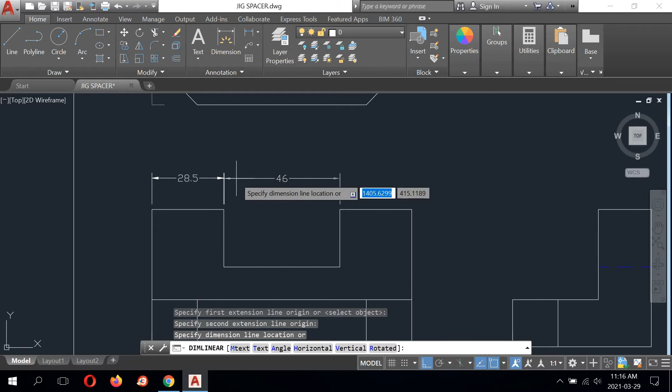Ortho is on, that's always important when running linear dimensions. I'm going to grab a linear dimension from the annotation bar and begin, endpoint to endpoint. Snap that dimension, use a grip, and move it out 12 millimeters. Right click, left click, repeat dim linear, endpoint to endpoint, and snap that 46 right in line. I'm not going to place the 28.5 here since I need to leave one out of the chain.

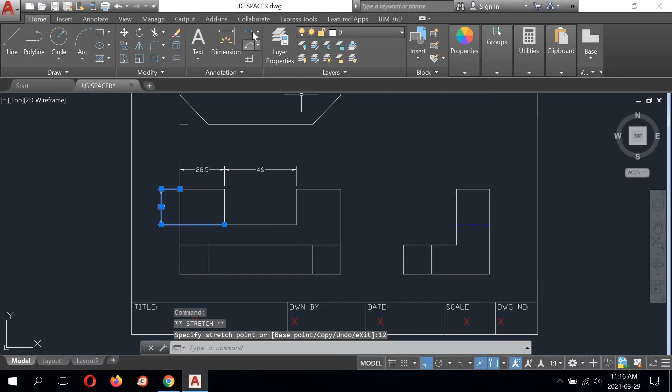So moving on, I also have the 22 dimension, which shows the depth of this slot. I'm going to place the dimension on the outside of the views, like that. If I were to place it between two views, I could do this, but there's no advantage to it because the dimension looks exactly the same whether it's positioned on the right side or the left side.

I might as well keep it out from between two views to eliminate crowding. And anybody doing anything like this, this is completely unallowed, right? Because we're dimensioning to a hidden detail line here. So we have 3 dimensions, but obviously we can only have one of them. This one is definitely incorrect.

Delete. This one is not technically incorrect, but there's no advantage to having it between two views, so we're going to erase it, and we're going to maintain this one. This is the best possible 22 dimension I can place on my drawing. So that takes care of that.

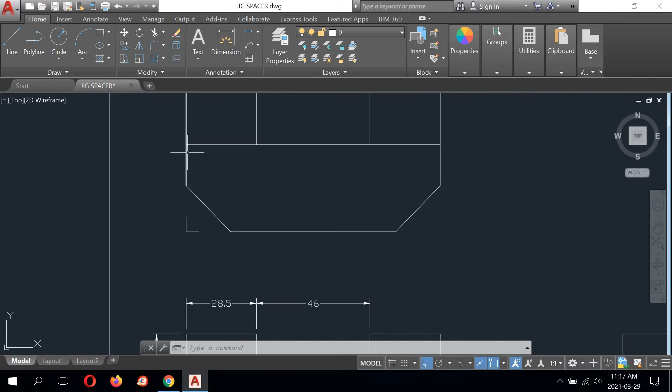What else do we have to take a look at here? Well, we have the 16 dimension, which is listed on the drawing here. So I can actually duplicate that dimension if I want. Let's try that, we may move it later. There's my 16 dimension. What else do I have to worry about?

I have my 34 dimension. I agree with its positioning as well. We can keep this on the top view just like this image shows us. Its spacing is a little far, so we're going to bring it a little closer, as we always have done. Our second dimension is always 10 millimeters from the first.

So we're going to repeat dim linear, go from here to here, snap that 34 in line with the 16, and now we're going to come out 10 millimeters, like that. This drawing isn't terribly hard to dimension. To me it seems pretty straightforward based on everything we've learned so far.

We also have to show the overall height, which is 52.5. That dimension is given, they're showing it to us right here. Again, I could put the dimension here, here, or here. I think I'm going to place it on the right side of the right side view.

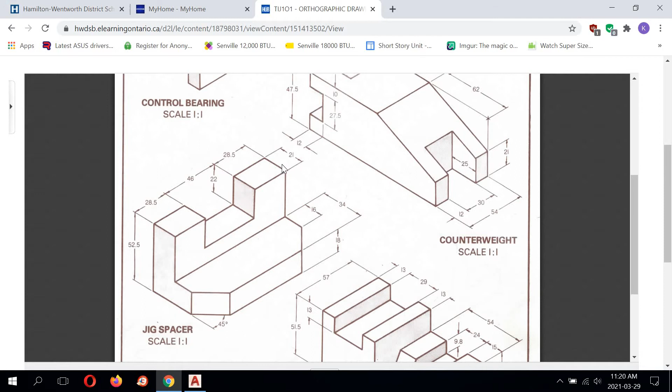I also have the 21 dimension. They show this dimension here along the top view projection plane. I'm going to place it on the right side view because...

That's going to give me a profile, right? Again, this is flat 2D perspective. I can't really avoid it with the 16 dimension. There's no real, that's probably the best place to put that dimension. As you can see, that's butted up against lots of 2D planes here that don't give us a good perspective of profile.

This is butted up right against the chamfer, so that's probably the best position for that 16. But moving on, we're going to snap endpoint to endpoint. I'm going to snap that right to the arrowhead of the 46, and that's going to give me my 12 millimeters right off the bat.

I also have to show the thickness of the base. I can only show that on my front view or my right side view. This is going to be one of those times where, again, I place a dimension between views because there's an advantage. This is the best possible position for that 18 dimension.

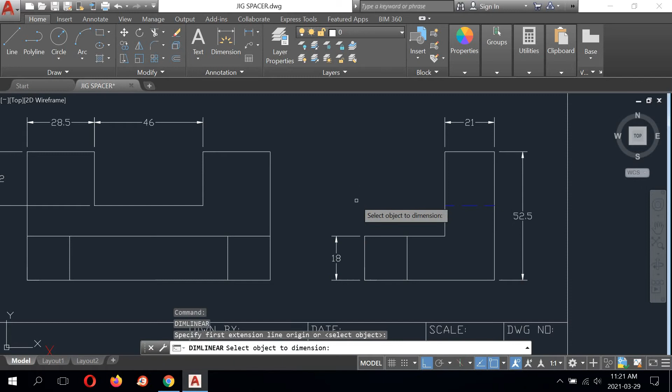Let's bring it out 12 millimeters. Why is that? Because it is dimensioned to a profile.

And in case you don't know what that means, if you were to stand in your bathroom right in front of your mirror, stare right into the mirror, and you look at your face, that's not a profile view of your face, right? You're seeing all the features of your face basically in one flat plane.

But if you were to turn your body 90 degrees and look at the wall, the reflection in the mirror of your face would now be your profile, right? Where you actually see the shape of your nose, the curve of your nose, the curve of your chin, how your chin comes down and meets your neck. That's all considered profile. And it's the same in a drawing where we want to see the actual shape of something.

So here we go. That looks good to me. And we're almost done with this drawing. We have to show the angle, which is 45 degrees. Now, we can show that right here.

So we need to grab the angular dimension. Pick the drop-down arrow, select angular, select, you can select here and here. And that will give you that 45 degrees.

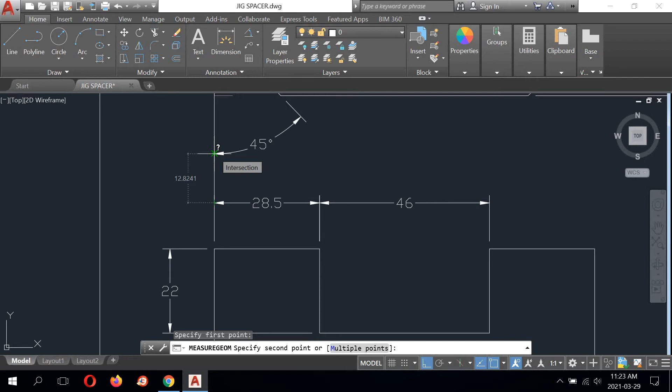Now again, we got to be careful that we're not actually going to be crowding the dimensions too much here. As you can see, I've already got the 28.5 here. So we want to make sure we've got adequate spacing. So it's okay, it's over 12 millimeters away, so that is acceptable.

Again, we try to avoid crowding these things if we can. I may make an adjustment to this just to improve the appearance of this. So watch for that in a few moments.

And a review: angular dimensions, we don't actually grip these out a certain distance. We basically just try to drop it on the drawing and have it look nice. Linear dimensions are the only dimensions we can accurately space a certain distance from the edge of the part view.

What else do we have? We've got the overall thickness. We need to have the overall width and the overall length. So the overall length can be placed along the top of the top view.

So we're going to go back up here, select the linear, endpoint to endpoint, and we're going to grip this out 12. And this looks pretty good where it is, if you ask me. It fits well. It looks good along the top view, so I'm happy with that.

So I have my overall length, my overall thickness. I just need my overall width. And so where are we going to place that? Well, we can place that dimension here, the 55, and it has to come out 10 millimeters.

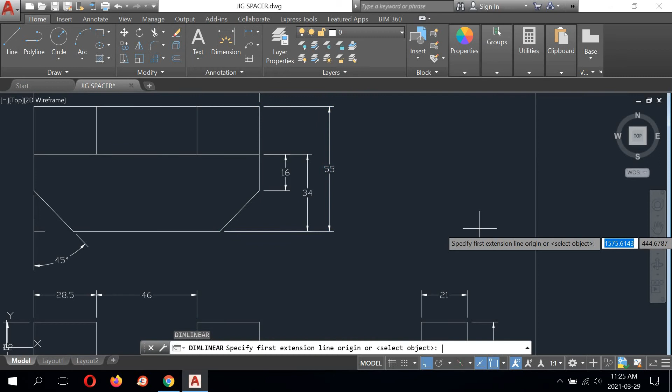It's not set in stone. I can run the dimensions somewhere else, and I may do that. One thing that I don't like about this is the 45 degrees being so close to 28.5.

So this is what I'm going to do to alleviate that. I'm going to erase this dimension, and I'm going to erase these two. I'm going to place those dimensions on the left side of the top view because, again, it's not breaking any rules. I could have them here or here. They don't crowd any views, and if they fit on the left side of the top view, then we're laughing.

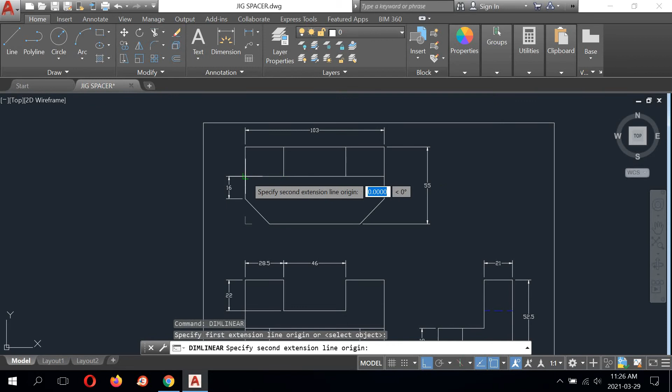So let's run those dimensions again. So from here to here, we have a 16. We're going to grip it out 12. And then we have from here to here, the 34 dimension, it's got to come out 10. And that fits very nicely.

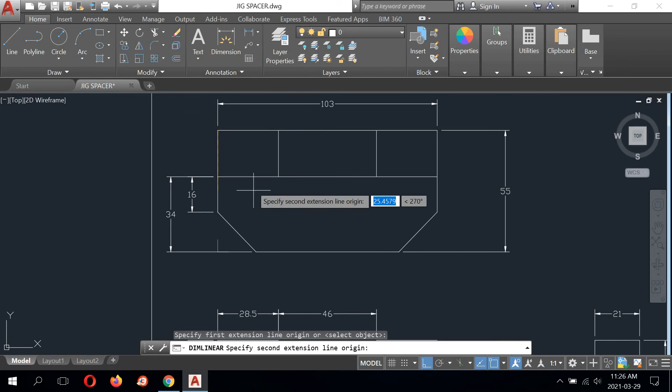So now what I can do, now I'm not going to be able to fit my 55 over here. It's going to be too crowded, right? And just to prove that to you, see that?

That's not going to work. It has to fit inside the border. So this dimension, I can't run it there. I could leave it here, but I'm going to have to move it in closer because it's way too far away. Or I can place it on the right side view. I'll make a decision about that in a moment.

One of the last things I need to do is also dimension the chamfer, which I had over here, and I'm going to have more room for it now. So I'm going to go angular dimension, select this line and this line, and come down 45 degrees.

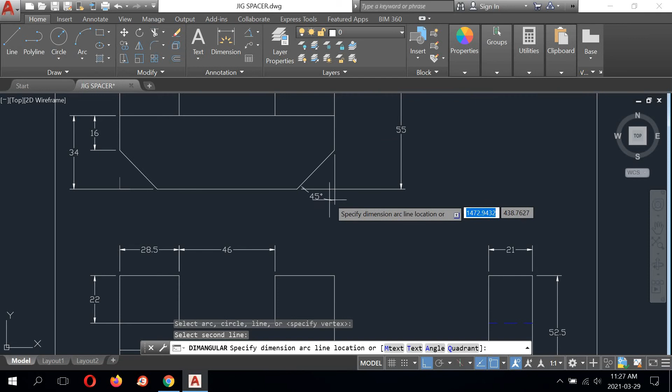And we want it off the part. They show it on the drawing, like on the part like this. You want to bring it off. Something like that. And now that's no longer crowding anything here. So we've given ourselves some breathing room.

This 55 dimension, it's got to be brought in, and we can bring it out 12. And I can also run that 55 dimension on the right side view. Let's see what I like better. So let's run the 55 to here. Let's bring it up 10.

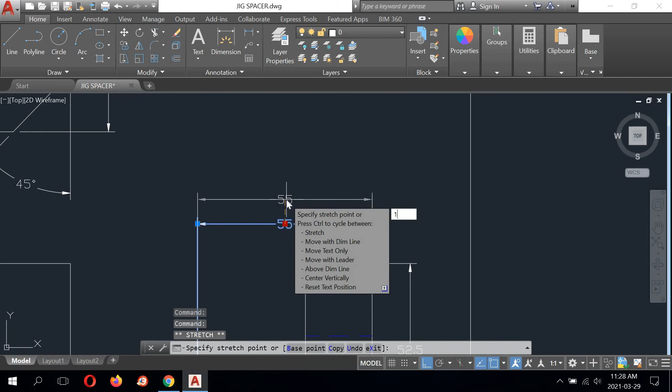So I've got two dimensions here that are over dimensioned. I can't have more than one of the same dimension on any of the other views. The 55 is duplicated, so either one is correct. It comes down to personal preference. I think I'm going to leave the 55 along my right side view and drop it from the top view, only because this extension line crosses over this extension line for the angular dimension, and I can avoid that if I drop this dimension. So if I take this dimension and erase it, that does clean things up a bit.

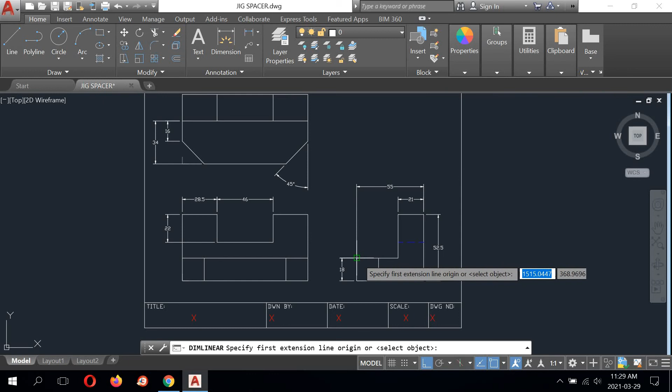So basically I have all the dimensions I need to manufacture this part. I have my overall thickness, I've got my overall width, I know how large the top of this flange is, and I do not require a dimension here, because that's over dimensioning, right? I already have my overall, and I have to leave one out of a chain. So I'm leaving this dimension out.

I've got the thickness of the base listed here, which is 18. I know the width of the slot, I know the depth of the slot, I know the width of this left-hand flange, and I don't need to worry about what it is here because I have my overall length listed.

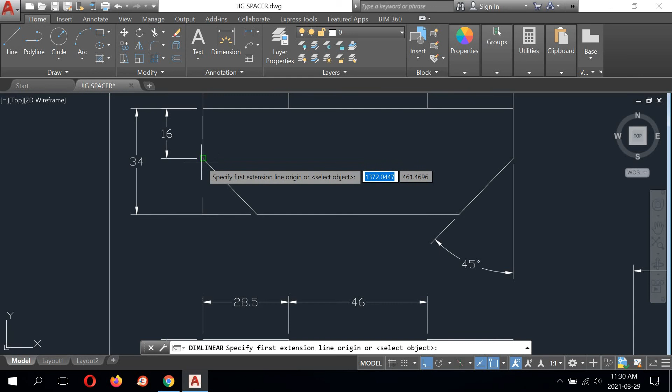And if you ask me, technically we don't even really need this 34 dimension, but I'm going to leave it there. It is important to know what this 16 is. This should be 18 from here to here, right? Because that's the width and length of the chamfer.

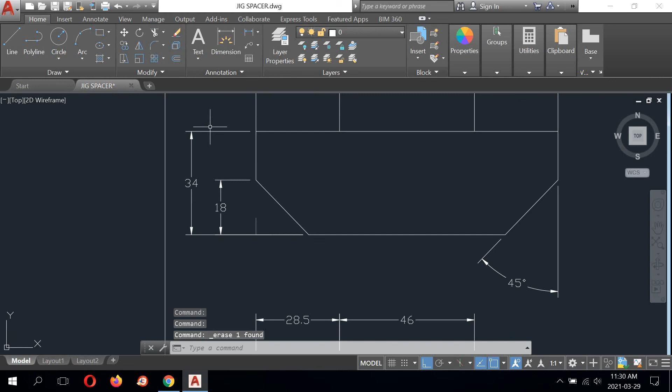Of course, again, this over dimensions. It's up to you. You have to leave one of these dimensions, and I may decide just to drop the 16 because I think it's easier to understand where the chamfer begins from the front of the top view. So again, we have our overall here, which is good, but we can drop this 16, I think. So I'm going to do that. I'm going to drop the 16, just have the 18 and the 34, and I think that looks better.

So I'm pretty happy with how this turned out. And again, I'm not referring to the basic orthographic dimensioning rule list exactly. I'm not showing that, but I am discussing all the points. If you reviewed this drawing now and compared it to that note I showed you a couple of lessons ago, you would find that all of the rules are being adhered to.

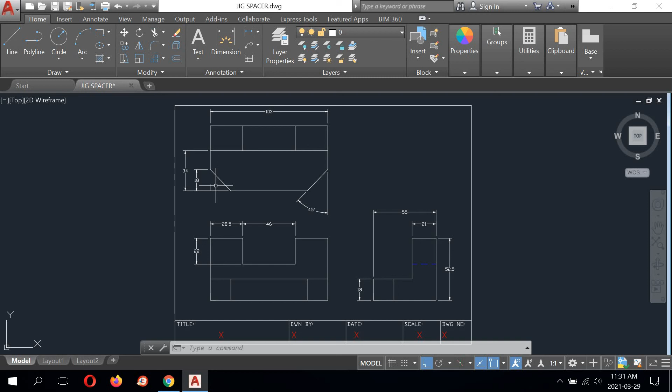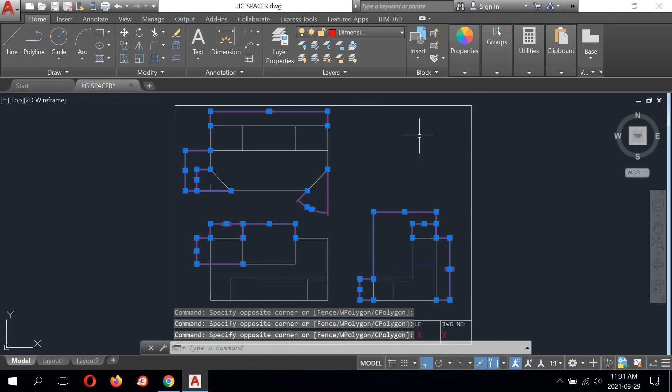All I need to do now is select them. I can select multiple at once. If I draw a little box from top right to bottom left, I can do a multiple selection. Place these dimensions on the dimension layer. Don't delete them. And then lastly is the title block.

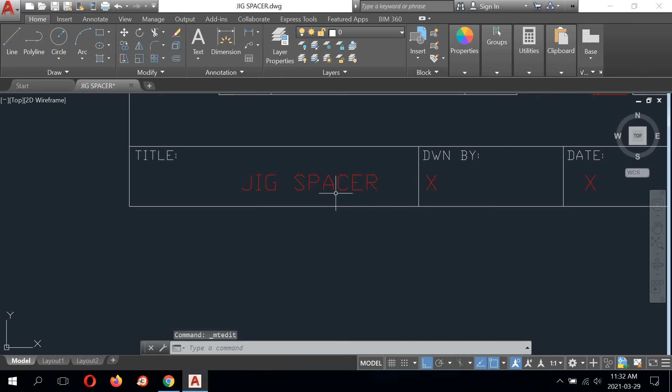All capitals, JIG SPACER. Let's stretch this out like we've learned to do. Click out. This isn't centered. Make sure ortho's on. We'll select it with a grip, pick move from modify, and we'll just move this to be into the center as best we can. About there.

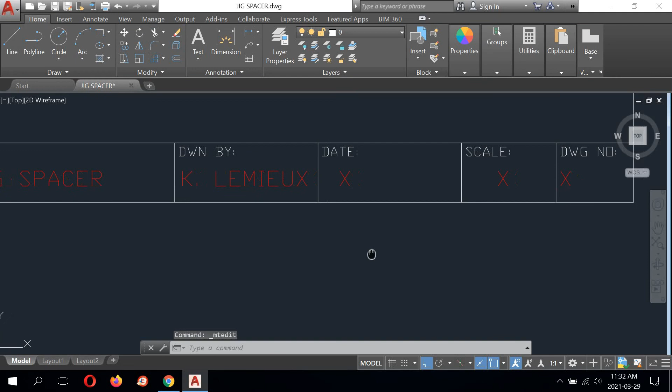Drawn by. I drew this one, so I'll put my name here. Date: 3rd month, 29th day, 21st year. Scale, 1 to a ratio of 1.

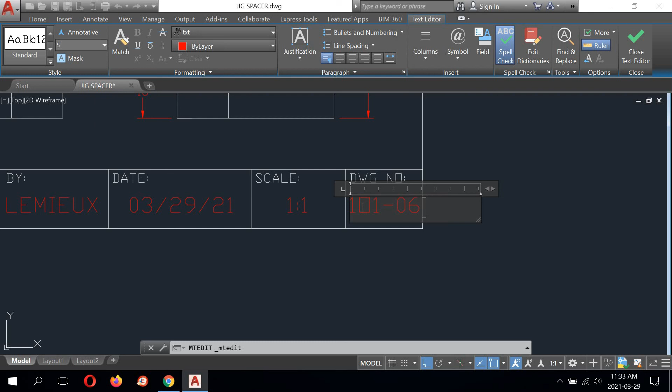And that's very well centered. I don't need to adjust any of these. And then I have drawing number, 101 dash—this is the 6th drawing, correct? Yes. And that fits very well. And that is the JIG SPACER. I'm going to do one last thing.

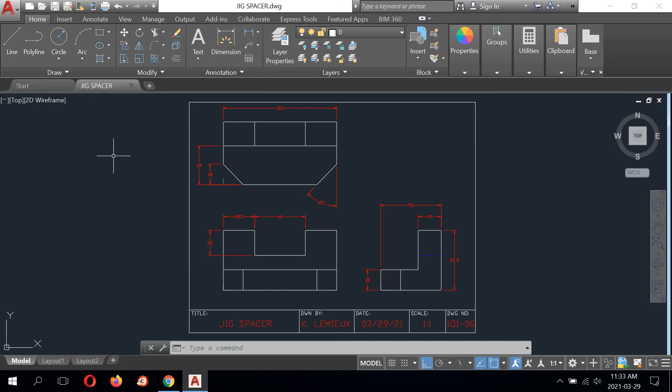So I hope you found this lesson helpful. I'm really hoping that when you listen to the dialogue you're really starting to understand the rules of dimensioning and orthographic drawing, and how we have to do some critical thinking and make sure we're not crowding things, putting dimensions in the best position where they can be understood, etc. So that's it for this video. I wish you luck with this. Let me know if you need any help or if you have any questions, and take care for now.